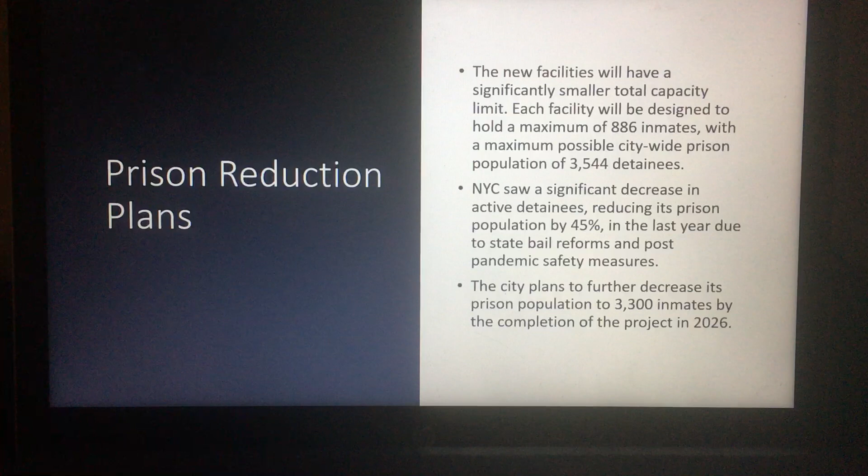Citywide reforms and increased maintenance and transportation costs have rendered many facilities on Rikers Island inadequate. All the existing programs are planned to be replaced with modern, borough-based facilities by 2026. No reasonable amount of renovation would allow Rikers Island to comply with these new regulations.

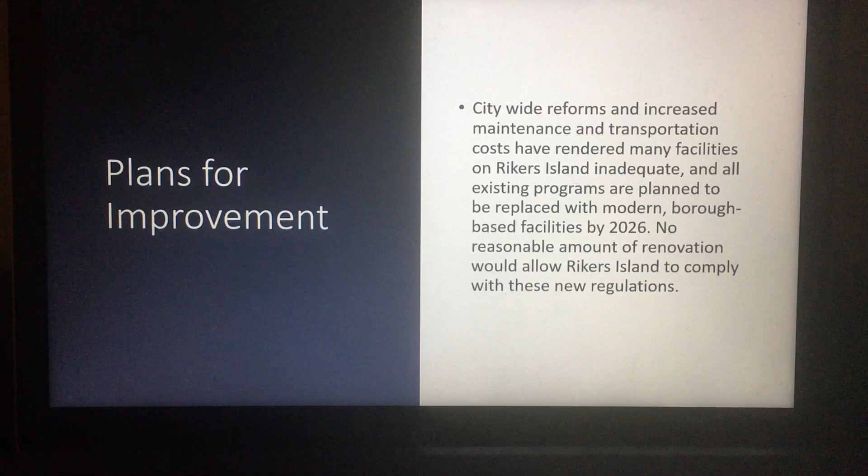The new facilities are planned to be built on the site of existing city detainment centers, with the exception of the proposed Bronx facility, which will be located on what is currently a New York City Police Department operated tow yard. The new facilities will have a lower maximum population in exchange for more humane conditions and a more accessible location for visitors and lawyers to more easily visit prisoners.

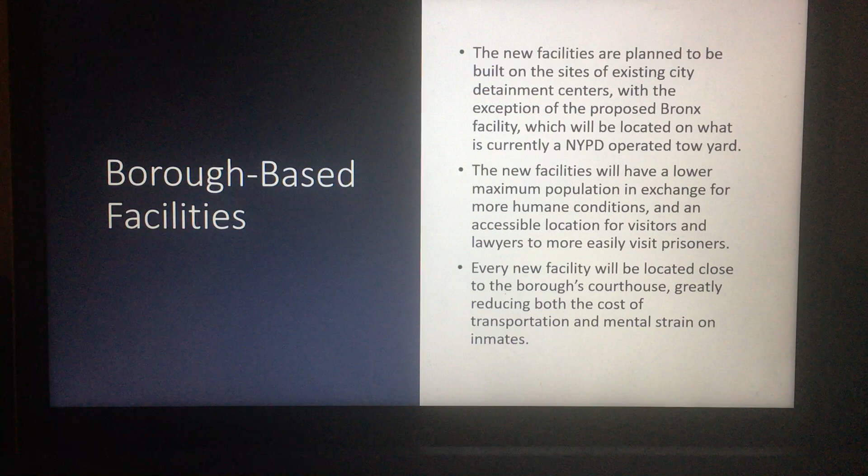Every new facility will be located close to the borough's courthouse, greatly reducing both the cost of transportation and mental strain on inmates.

This long-term project is subject to the City Environmental Quality Review, CEQR, as it is being directly undertaken by a city agency. The city agency is providing the financial backing for this project, and the project must receive extensive permits and approvals from the city.

The project is still in its early stages, with the demolition of the first antiquated jail scheduled for 2021.

The first task in this project is an extensive project description for each facility that has been proposed and is publicly available. The impact on the local community and resources has been estimated, and the necessary permits and admin has been identified to successfully complete each of the new facilities.

The following are examples of publicly provided documentation for the completion of this project.

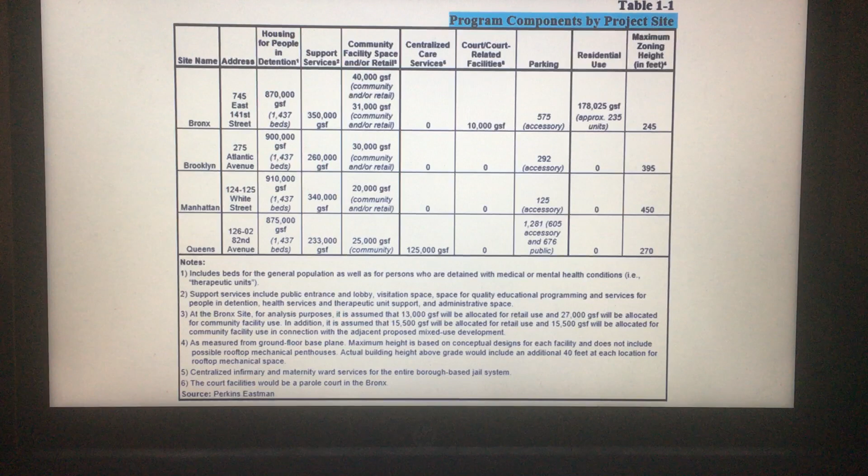The first major case of admin is defining the land use, zoning, and public policy of each of the locations where the new facilities will be used.

For the Bronx Center, it is to be built over the New York City Police Department towed car lot. It is not within any city waterfront revitalization program boundaries, which is very helpful for obtaining the necessary permits.

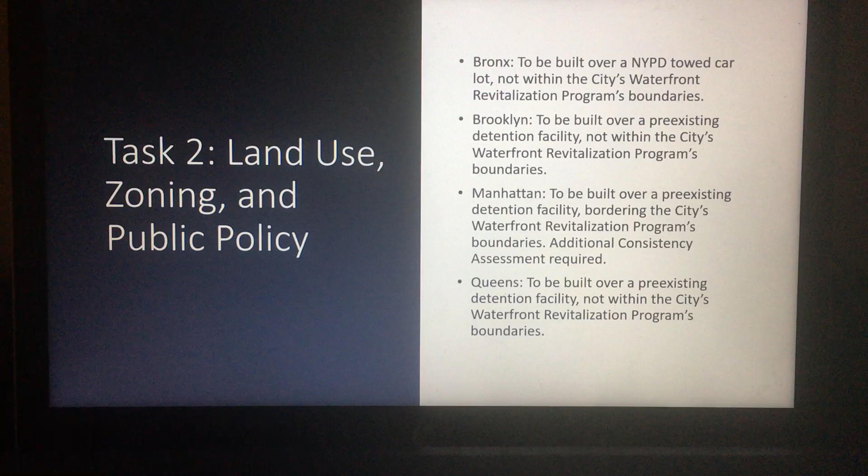For socioeconomic conditions, the Bronx complex will include more than 200 residential units requiring an additional residential displacement assessment. No other facility will affect local residential population enough to require an additional assessment.

Task 4, Community Facilities. With the exception of the Bronx facility, all projects will take place on existing detainment centers. As it is located within a school zone, an additional assessment was required in order to measure the Bronx facility's impact on the local elementary school and its students.

The Manhattan site will be located on a site currently containing the borough's district attorney office and state office. All non-detention related facilities will need to be relocated upon construction.

Task 5, Open Spaces. No site is located within an underserved or overserved area. The Bronx facility introduces additional residential population to the project area. Preliminary open space analysis has been completed following CEQR regulations. All sites will be built over pre-existing facilities, preserving open space and community facilities as much as possible.

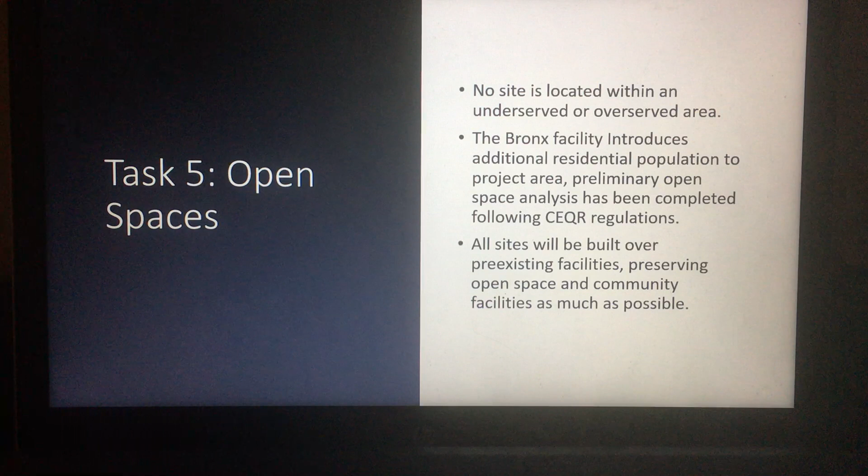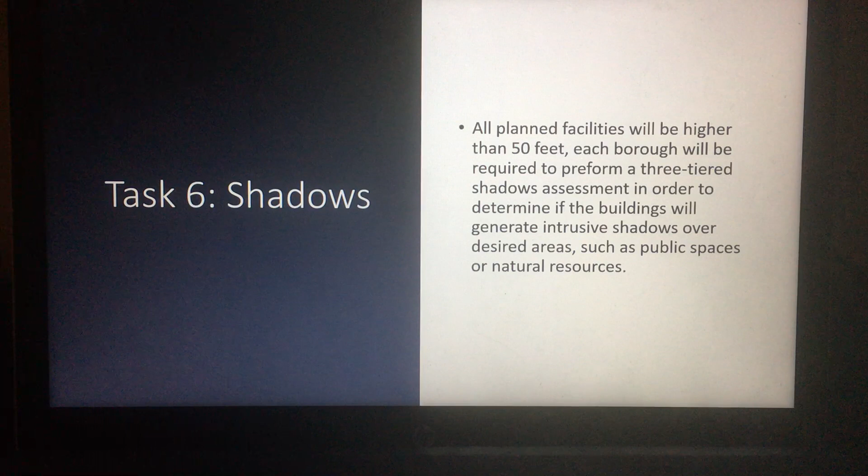Task 6, Shadows. All planned facilities will be higher than 50 feet in height. Each borough will be required to perform a three-tiered shadow assessment in order to determine if the buildings will generate intrusive shadows over desired areas, such as public spaces or natural resources.

Task 7, Historic and Cultural Resources. All facilities will be constructed on government sites that previously had similar or utilitarian services. All project sites will involve additional ground excavation, requiring an additional archaeological and architectural assessment before being able to go forward.

Task 8, Urban Design and Visual Resources. All project sites will introduce new buildings to the areas that will result in substantial physical alterations that will be observable from the surrounding areas. An EIS analysis is required for each site.

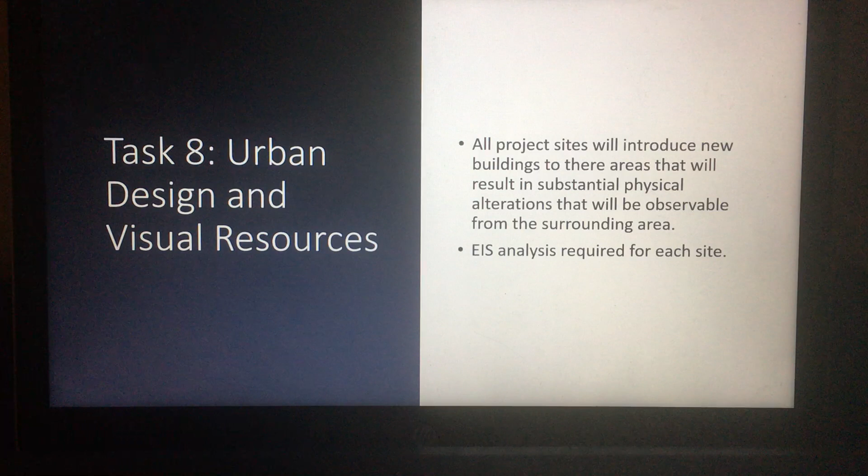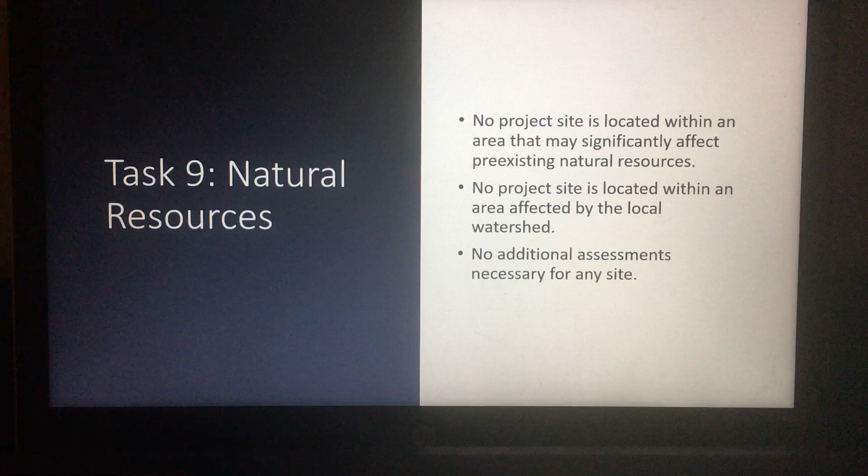Task 9, Natural Resources. No project site is located within an area that may significantly affect pre-existing natural resources. No project site is located within an area affected by the local watershed. No additional assessments are necessary for any site on the matter of natural resources.

Task 10, Hazardous Materials. A Phase 1 environmental site assessment has been performed on all sites, all of which have determined that there is enough evidence to begin a Phase 2 hazardous material investigation.

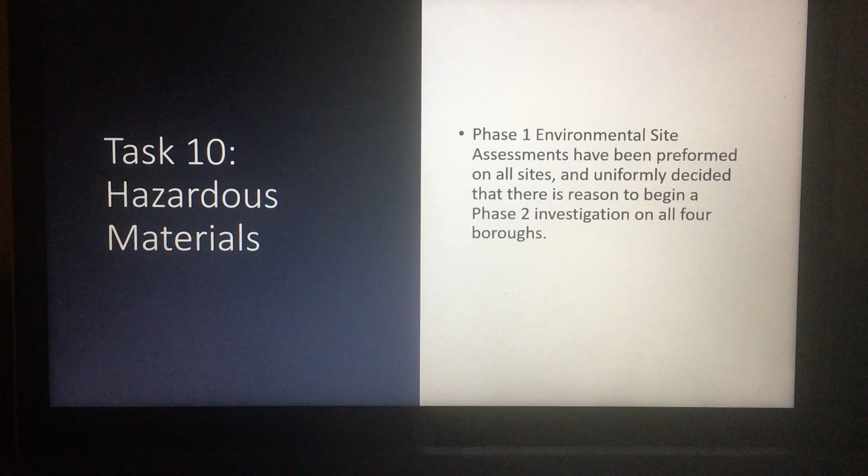Task 11, Water and Sewer Infrastructure. All planned buildings will connect to the city's combined sewer system and exceed their borough's minimum square footage, requiring a preliminary impact analysis.

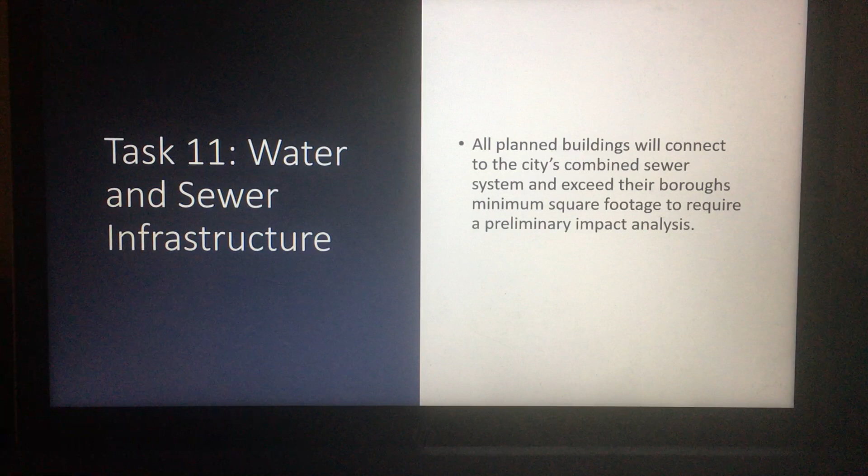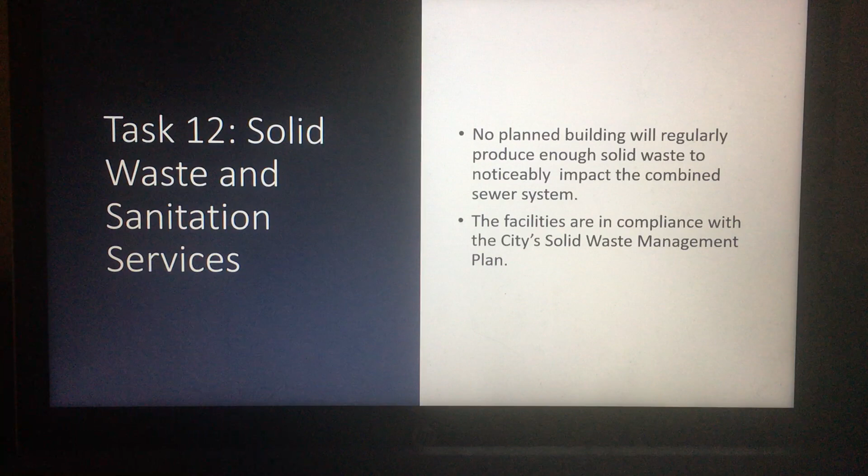Task 12, Solid Waste and Sanitation Services. No planned building will regularly produce enough solid waste to noticeably impact the combined sewer system. The facilities are in compliance with the city's solid waste management plan. No additional assessments are required as of this moment.

Task 13, Transportation. The facilities will be designed for easy access, as lawyers and family members will be significantly less inconvenienced to travel to and from borough-based prisons compared to Rikers. Every borough will see a significant increase in vehicular transportation around these facilities, and an impact analysis will be required for each site.

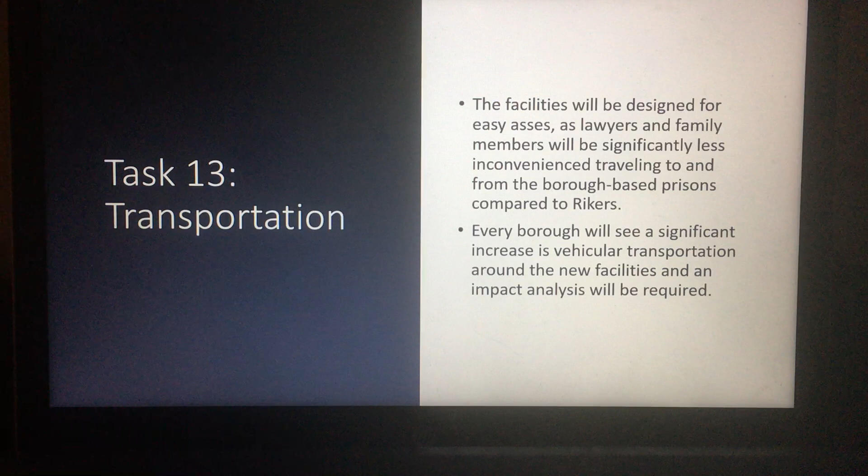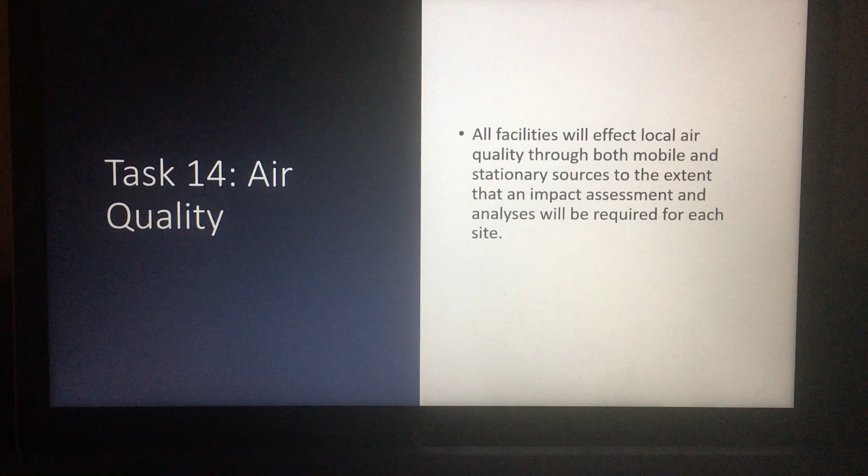Task 14, Air Quality. All facilities will affect local air quality through both mobile and stationary sources to the extent that an impact assessment and analysis will be required for each site. This is through both everyday activities at the facilities and through the additional vehicular air quality impact caused by excessive travel to and from the site.

Task 15, Greenhouse Gas Emissions and Climate Change. All planned facilities will have enough square footage to warrant a GHG, or greenhouse gas, emissions assessment. This is standard for all buildings past a certain size within the city.

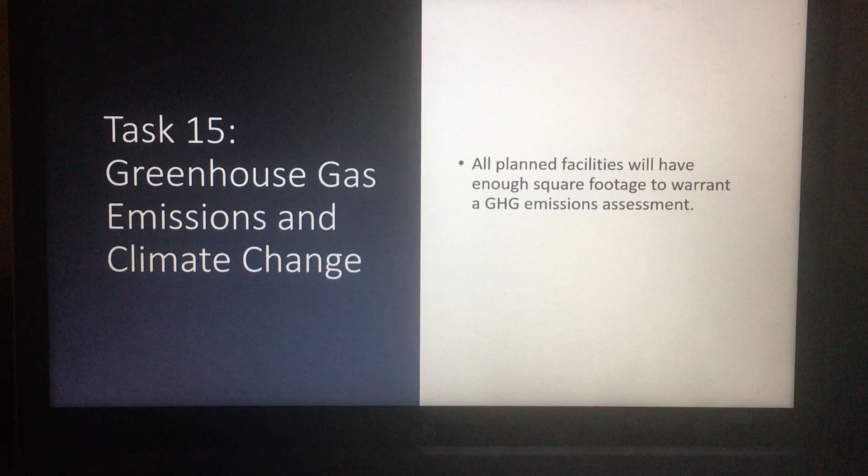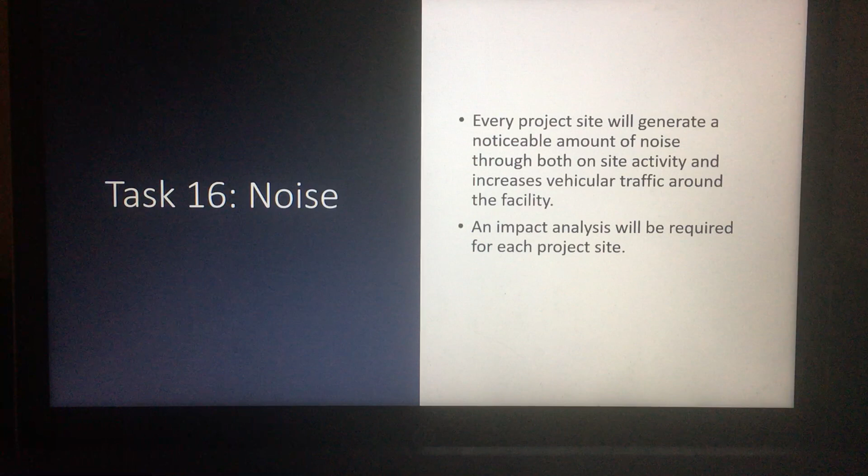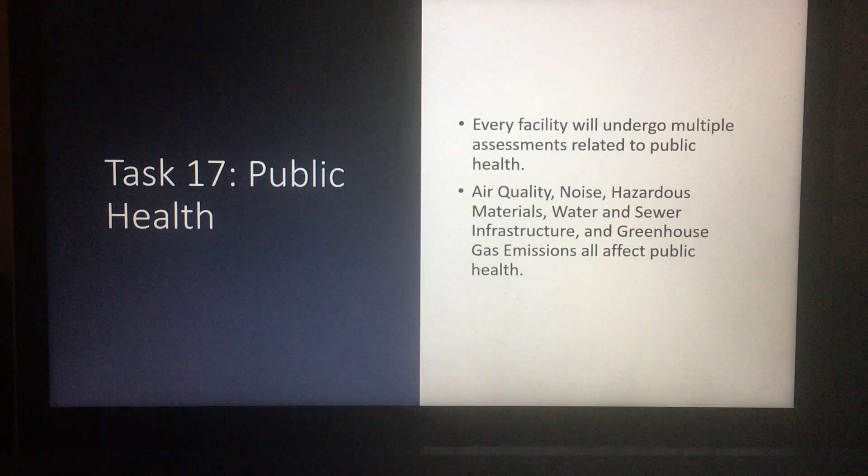Task 17, Public Health. Each facility will undergo multiple assessments related to public health. Air quality, noise, hazardous materials, water and sewer infrastructure, and greenhouse gas emissions all affect public health, and the assessments mentioned previously will all go towards this section.

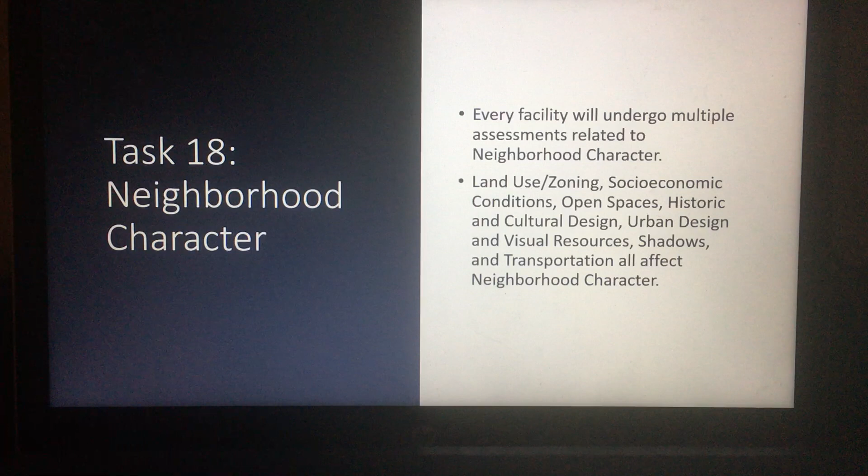Task 18, Neighborhood Character. Each facility will undergo multiple assessments related to neighborhood character. Land use and zoning, socioeconomic conditions, open spaces, historic and cultural resources, urban design and visual resources, shadows, and transportation all affect neighborhood character. All previously established assessments will go towards neighborhood character.

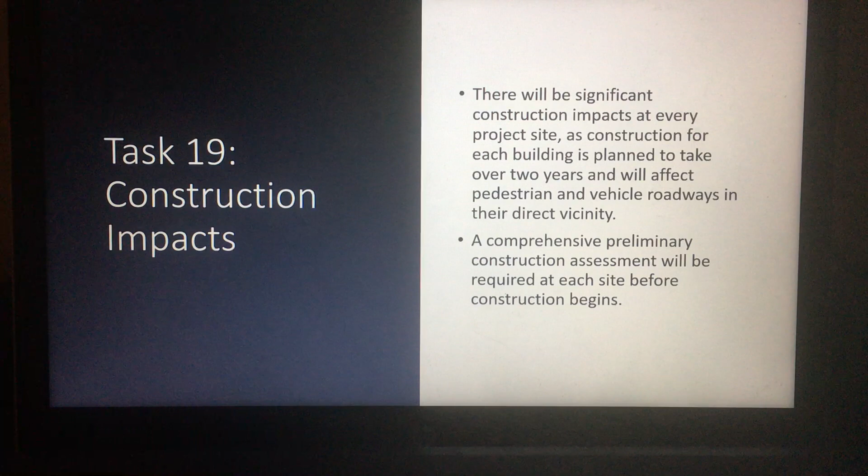This is an overview of the CEQR process as outlined in its manual.

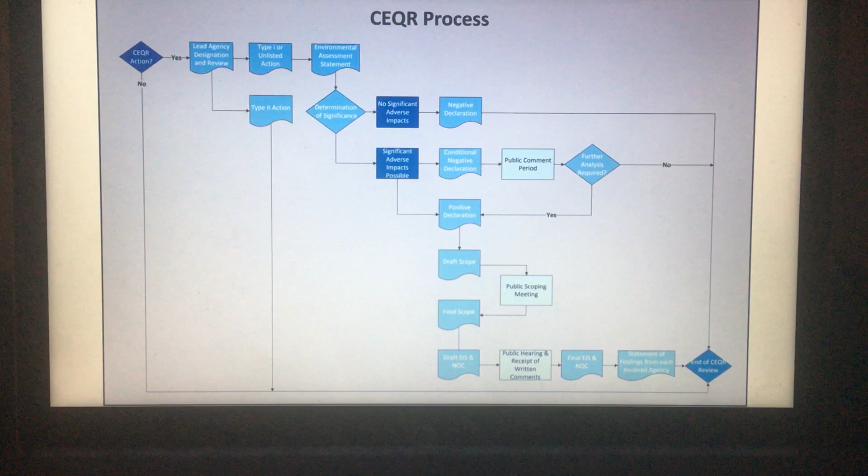Project conclusion. This project is scheduled to be completed by 2026, but due to budget concerns, the final date has been pushed back to 2027, with various concerns over the city's past ability to meet projects on time. That date may be extended by multiple years. However, Rikers Island is planned to be fully decommissioned by 2027.

The 4 borough-based facilities will begin construction over the next few years. Overall, the city has responsibly followed the CEQR guidelines, and with proper assessments and investigations conducted as they become relevant to the project, the project should provide a more humane and cost-effective prison system for New York City, effectively becoming a better system than Rikers is at the current moment.

As of this moment, I believe that New York City has responsibly followed the CEQR guidelines to the best of their abilities.